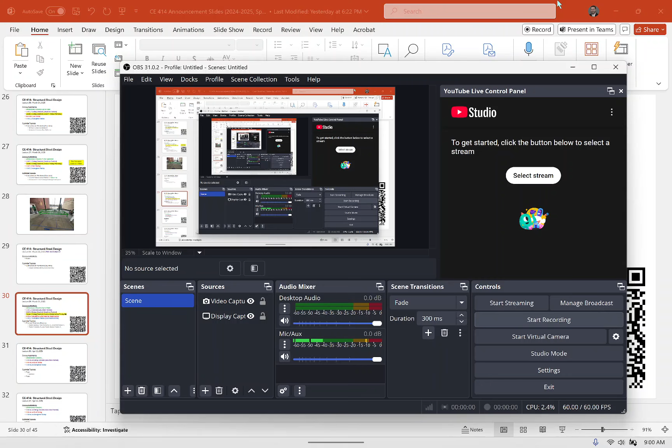Did they give you any background about the cup when they were announcing it, about the history of it?

I'll tell you a little background. If you look at the cup, we had won the competition about 10 years ago, but I think this was the first time the cup left the state of Virginia. Is that what they said? I don't know, they didn't say anything.

So a little background: the Hardy Cross competition goes back decades, but the actual trophy had to stay in Virginia because that's where Hardy Cross was originally from. So if a student in West Virginia won it, we got a little trophy, but the cup went back to the host school. About 7 or 8 years ago, the conference got together and bought a new cup that could travel, since the rules said the old cup had to stay. So they retired that cup, and I think it's at Old Dominion right now. I think this is the first time the cup has actually traveled outside of Virginia. So good job, sir.

Now we have to find a place to appropriately protect it. We've got our display case, but in all honesty we might get a new display case for it, I don't know. We've had some preliminary discussions about that this morning because it's heavy. I'm a little concerned about putting it in the one in the hall because of those little glass shelves. It's big, it might not even fit that way, maybe too deep.

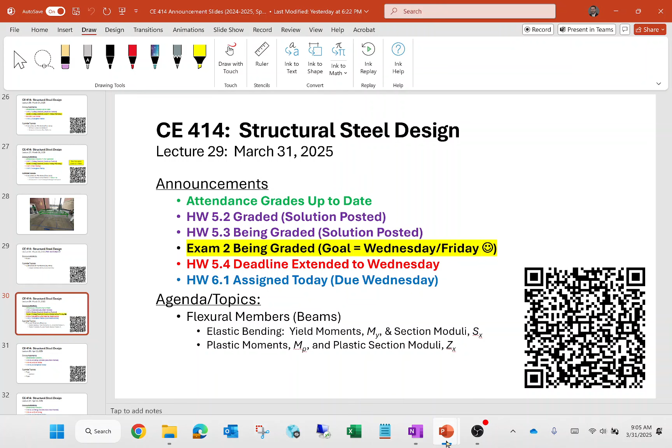I distracted everybody with discussions of trophies and whatnot. But again, congratulations to our team who did very well, had one of the most memorable canoe races in conference history. That was amazing, everybody in the crowd was like, well, you don't see that every day. That was spirit of the competition, right? Wouldn't you say we should have gotten spirit of competition?

We didn't? No, they gave it to the high school guy. Oh well, okay, they gave it to the high schoolers—they give it to them every year. They gave it to us. Okay, alright.

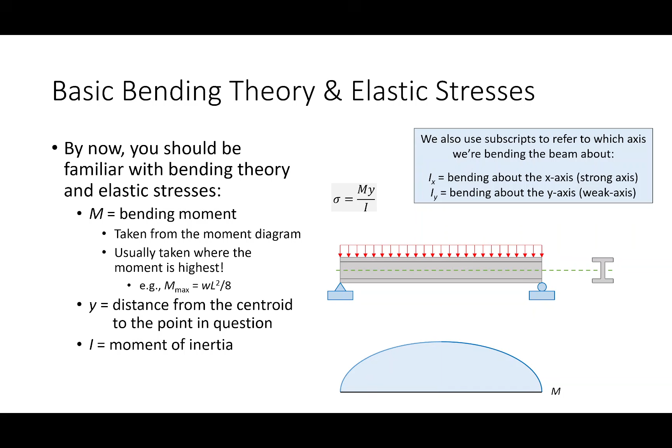And that comes from this: as the I gets bigger in the denominator, this gets smaller. So it also tells us that bending stresses are essentially zero at the centroid, and as you get further away from the centroid, the bending stresses increase, either in compression or tension. You've probably heard the phrase 'smiley face positive, frowny face negative.' So if the beam smiles at you, the top's in compression, the bottom's in tension. We refer to that as positive bending. Everybody with me so far? I'm not speaking way out of turn — everybody knows what I'm talking about.

Okay, so let's dig a little bit more into Engineering 216 territory. A lot of what I'm doing right now is both a refresher of concepts you should have seen before, and also introducing some notation. For example, the moment of inertia: we have a moment of inertia about the x-axis and about the y-axis, depending on which way we bend the cross-section, just like we have a radius of gyration about the x-axis and y-axis — an r sub x and an r sub y, just like we have an I sub x and an I sub y. We also have an s sub x and an s sub y.

So what's the deal with the section modulus, or this term S? Well, if sigma equals M y over I, that expression tells us the bending stress at any arbitrary point along the depth of the cross-section.

If the bending stresses are zero at the centroid and maximum at the top and bottom, and it's linear, we don't often care so much about the bending stress in between. What we care about is the bending stress at the very top or the very bottom. I'm not saying that's always the case—sometimes we do care about bending stresses in the middle, and there are clear examples of that in bridge engineering, for example looking at welds at certain depths. But usually all we care about are the maximum stresses at what we call the extreme fibers, either the very top or the very bottom.

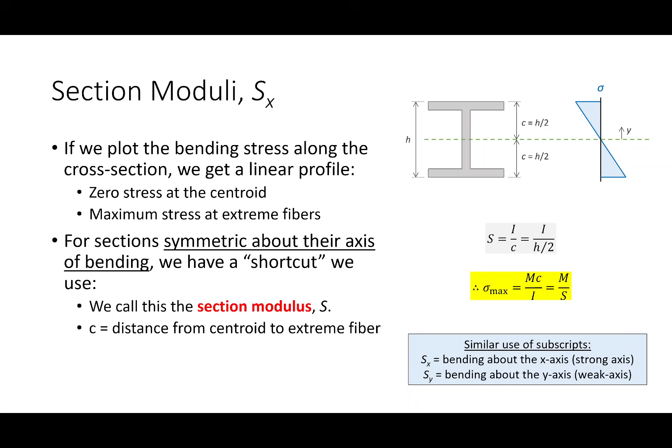We can look these values up for I sections—we can look up an I value, an S value, and an R value. Let me just make sure we're all on the same page, so let me orient everybody to what I'm talking about here.

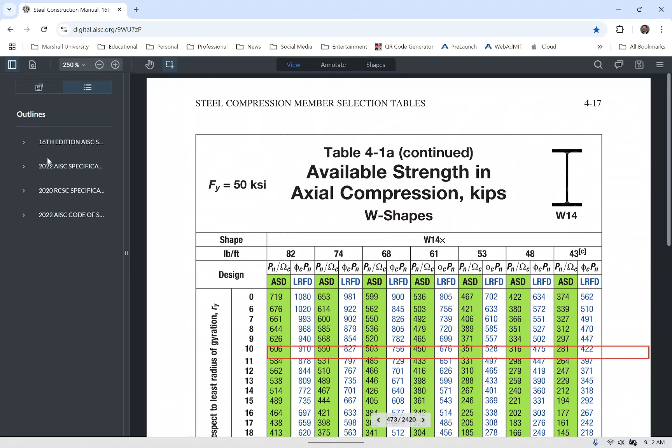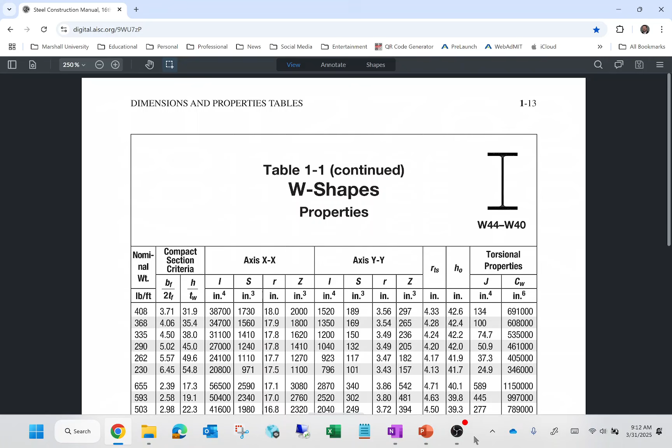For example, if I look at Table 1-1 looking at W shapes, on the right page you see the x-axis and the y-axis, and we have a moment of inertia, a section modulus, and a radius of gyration. What we haven't talked about yet is this term Z, and that's what we're going to illuminate today—what is Z, how does it apply to bending, and so on. We're getting there—if this were Sesame Street, this lecture is brought to you by the letter Z. That's sort of what we're doing here. We'll get to that.

Let's go back and rewind the clock a little bit to Engineering 216. Sigma equals My over I, or sigma equals M over S, is the expression we use to characterize bending stresses. In Engineering 216, we might say, for a given material, what is the biggest sigma that we will allow—what is the biggest stress we will allow? Since Engineering 216 largely assumes linear elastic behavior in mechanics-based calculations, we'll limit the stresses to Fy. That's our biggest sigma: sigma max equals Fy. So elastic bending theory holds true until that's the case.

So what we'll do is say, if sigma equals Fy, set that equal to M over S, what we can figure out is the biggest moment we can apply to a cross-section. That biggest moment, in this case, we'll call My, and that's again assuming elastic bending theory. I'm rattling on a bit, but I want to take a step back and be precise and clear: if you restrain your analysis to elastic bending theory, then the yield moment—the point at which the stress at the extreme fibers hits Fy—is the largest moment that the beam can withstand if you restrict its behavior to elastic bending.

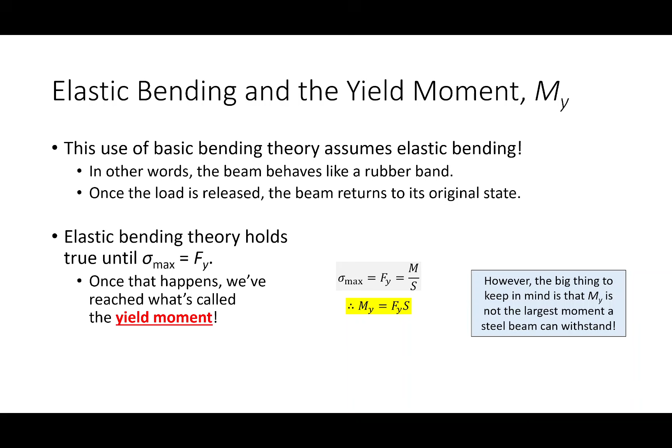So what the yield moment is saying is that I'm bending, and that stress profile is increasing until either the top or the bottom reaches Fy. And that is true. That's when elastic bending theory would break down, because then we've hit Fy on the top and bottom, and then we're going to start to lock in permanent stresses.

But then the question is, well, what happens past that? We're going to get to that. I want to take a step back and go through some Engineering 216 calculations with you. I want to be crystal clear: you are not going to have to do these calculations in this class. This set of slides on this example is really more meant as a refresher. I also want to use this symmetric example to explain not only what S is, but what Z is, and we'll get to that here in a bit.

So I have here an I-shaped cross-section. I'm trying to keep the cross-section really easy, so I've said that every plate is 1 inch thick. In all honesty, we would probably never design a cross-section like this, except maybe if it was a built-up section in a high-rise building where one column sees a ridiculous amount of load. In that case, you'd probably have a section like this, but in most routine practical applications we never use something like this. Again, trying to keep the math a little simple.

So just to make sure we're all on the same page, this is a 12 by 1 top and bottom flange. The web is 24 by 1 inches. So the total height of the cross section is 26 inches, because it's 24 plus 2 plates on the top and bottom. Remember that term extreme fiber distance - from the centroid to the very top or the very bottom. Without calculating the location of the centroid, do we all agree the centroid's running right through the middle of this? It's symmetric, right? It's the same picture up top as it is down below. So the extreme fiber distance, the c distance, from the centroid to either the very top or the very bottom, is going to be 13 inches, or half that. Everybody with me on that?

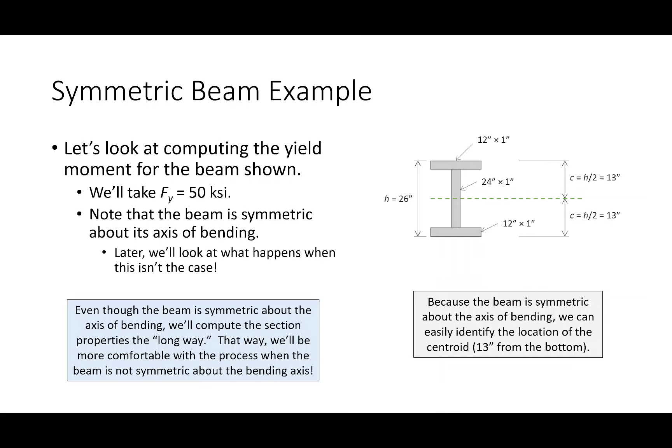Okay, so a lot of stuff here on this slide. I'm not making you do this by hand, but there's a lot here, so let's take our time with this. I don't know how you learn to compute a moment of inertia, maybe in 216. I know how I teach you to do it in statics. I'm an engineer, I love things in tables, so that's how I do it. So what I'll do is walk through this calculation.

So I have a big table. First thing I'll do is list the shape - I've got the top flange, web, and the bottom flange. Then for each shape, I'll list the area. Remember, everything is 12 by 1, or 24 by 1, and the thicknesses are 1 inch. So this is 12 square inches, 24 square inches, 12 square inches. I also have a sum row at the bottom, and the sum is 48. Everybody with me on that?

Okay, now what about this column right here? Now, I am doing this the long way, and I would argue that for this problem this is a little bit overkill, but I like showing you this way because whenever the shape gets non-symmetric, suddenly this becomes a lot more relevant.

All right, so the next thing we need to compute are these y distances. What I'll do is define a common reference axis, which I tend to call a datum. Basically, from the datum, how far is it to the centroid of each of these individual shapes.

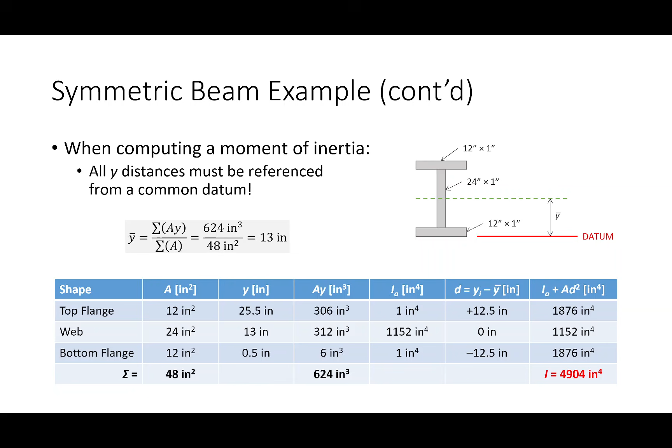Okay, good. So if I wanted to compute, let's say, the yield moment, what I would do is say, here's the moment of inertia. I would take the moment of inertia divided by the extreme fiber distance to get this term, which I'll call the section modulus. Take the section modulus, multiply it by, let's say, 50 KSI, if that's the yield stress. So 50 KSI times this gives me an answer.

Be cognizant of your units, because this is KSI in inches to the third. I'm calculating a moment, so this comes out in inch kips. So if I want foot kips, I got to divide by 12. I get a yield moment of 1571.8 foot kips. That is the maximum amount of moment I can place on this section before I get yielding at the very, very top or the very, very bottom. Does that make sense? All right, any questions on that?

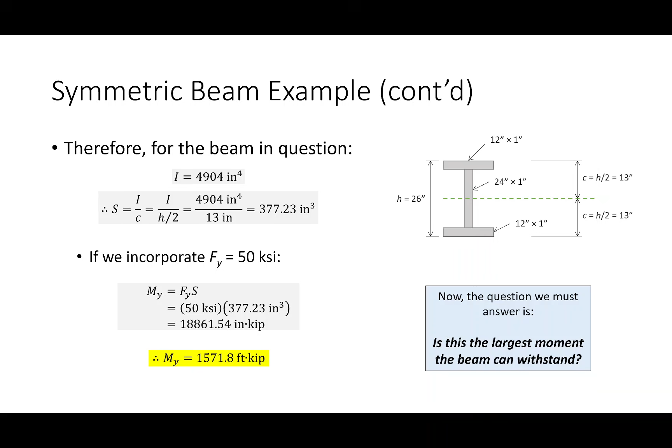Now I posit my question again. Is this the largest moment that the beam can withstand? Can it withstand more moment than this? Let's state the question different ways. Is this the largest moment the beam can withstand? No, the beam can withstand much more, and this is the reason why.

Let's look at this pictorially. This is the yield moment right here. What happens with the yield moment is we start off with zero bending stress, and then as we apply moment, we get more and more bending. Once the very top or very bottom hits Fy, that's the yield moment.

But the reason why that's not the largest moment the beam can withstand is this part of the beam has yielded. What about right here? Has this yielded? What about right here? What about right here? So the question would be, what if I've got the beam here in front of me and I'm putting load on it, putting load on it, putting load on it, and then I hit my...

What if I keep putting load on it? Just keep putting more, keep putting more. What's going to happen is, as we start going like this, this is the maximum stress. As we keep applying moment, the yielding is going to penetrate through the cross section until we hit this point, when every point in the cross section is yielded. So I propose that the yield moment is when we just start to hit Fy at the top and bottom, but this moment over here is when the yield stress is everywhere.

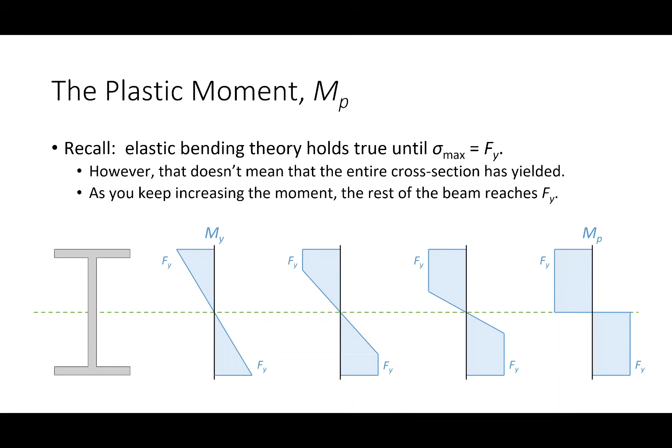Now some of you might be thinking that seems harder, seems more difficult to do the math for. But I would argue that computing MP is actually a lot easier than what we just did to compute MY. I think MY is a harder calculation. MP is a lot more straightforward, because MP is basically just summing moments about the central axis.

Let me ask a question. How many of you have already had concrete design? I'm curious if anybody here has had concrete design. For those who have, you'd know that for a singly reinforced beam, we assume the concrete reaches 0.85 FC prime in compression, we assume the steel is As times Fy, we find that magic distance A such that C equals T, and then we sum moments. Same idea here, the only difference is we don't have concrete and steel, we have just steel.

For those planning on taking concrete next semester, one of the very first things you'll do in the class is learn how to compute the capacity of a singly reinforced concrete beam. The way you do that is pretty much this, only with concrete you have to deal with two different materials, concrete and steel. Here it's just steel.

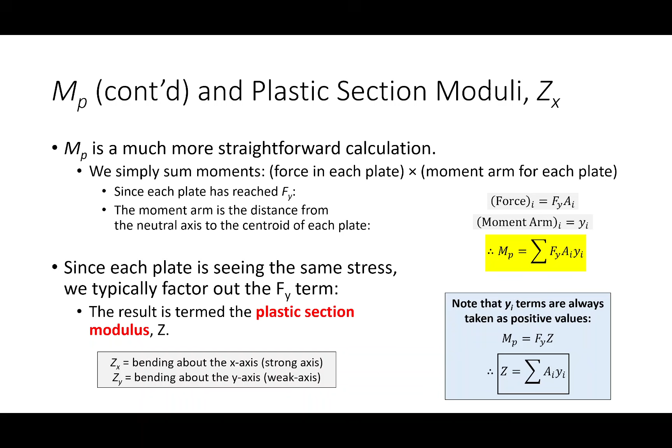In this case, we're going to call it Z. I can pre-calculate a Z value for any cross-section and have those tabulated. So what is Zx? Zx is what we call the plastic section modulus. And I should say we have a Zx and a Zy, but Zx is far more utilized in steel beam design, so I'll probably use the term Zx quite a bit. But all Z is a calculation of areas times distances.

So just to walk you through how you would compute Zx, it's really, really easy. Let's go back to the symmetric beam design. So in that design, we got this value for S, and this is what we got for My. Okay, so how do we compute Z?

Well, the first thing we have to do is figure out the line where the area above equals the area below. Why is that important? Because we're going to take those areas and theoretically multiply them by a yield stress to get a force. So we have to find the magic line where the force above equals the force below, or the force in compression equals the force in tension, because the beam can't run away from you.

So that axis needs to be found. Now, in the case of a beam that's symmetric, that's just the same place where the centroid is, okay? This line, the area above equals the area below. Some of you might be thinking, well, isn't that always the case? Isn't the line where the area above equals the area below the same as the centroid? The answer is no, that is not always the case. I'm going to show you an example today where that happens.

But once we find that line, all we do is take areas times moment arms. For example, the top flange: we take this area, 12 times 1, times that moment arm, so 12 and a half, so 12 times 12 and a half. What about the upper web portion? The area of this rectangle is 12, and how far is it from this line to the center of that web? 6 inches, right? So we do that for this, for this, for that, for that, and we get the Z value. Take Z times Fy, there's Mp. It's a lot easier than the S calculation, a lot easier.

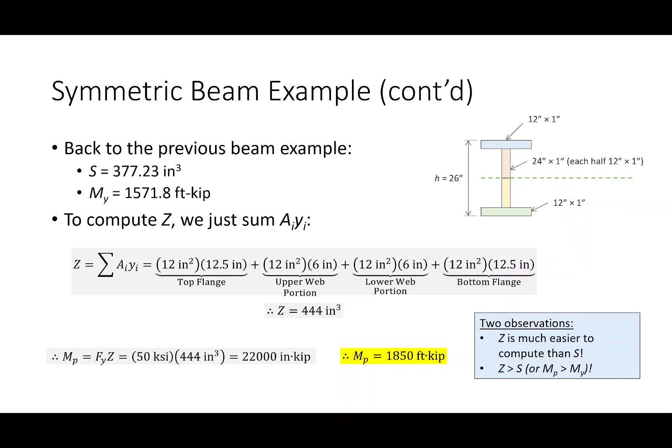Now, everything I put on the slide here is good, great, grand, and wonderful for symmetric cross sections. But what about sections that are non-symmetric? I want to introduce some terminology: the elastic neutral axis and the plastic neutral axis. The difference between the two is the elastic neutral axis is where the centroid is, but the plastic neutral axis is that magic line that splits the section up into equal areas—in other words, the area on top equals the area on the bottom. That is not always the same case, and I'm going to show you an example here in a second where that's not the case.

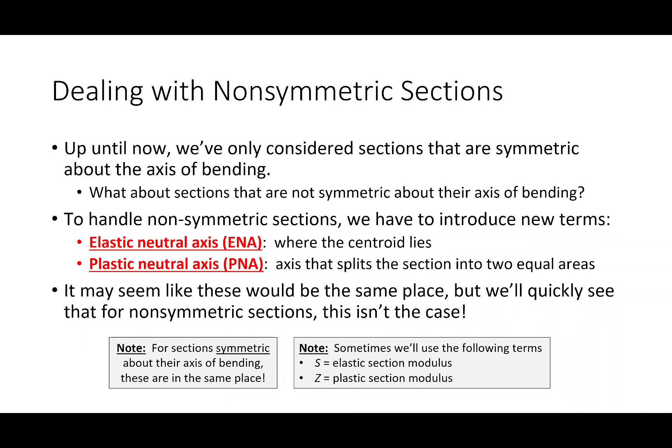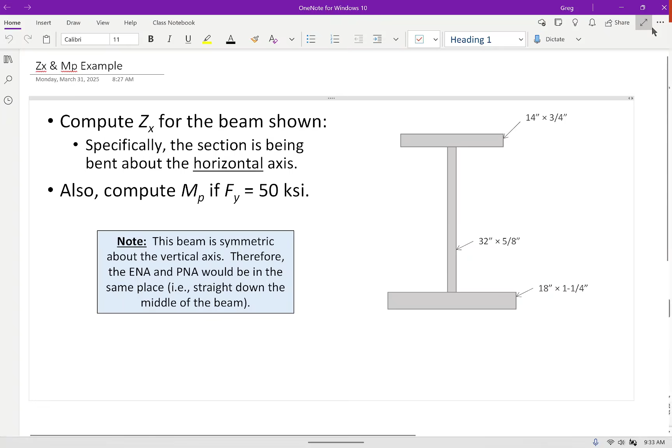Let's do an example because I think it will sink this in a little bit more clearly. I want to compute Zx for this shape. Now I've added a little more resolution to the numbers, so we've got different values, different thicknesses, and different plate widths, so as we do the problem we'll have a little more tethering to what we're doing. But it's not symmetric—in other words, the top flange and the bottom flange are not the same size.

Is that common in the real world in bridge engineering? You bet. It is very common that you have different size flanges for fabricated plate girders. That's very common. In fact, it's probably more common than the alternative, with them being the same size.

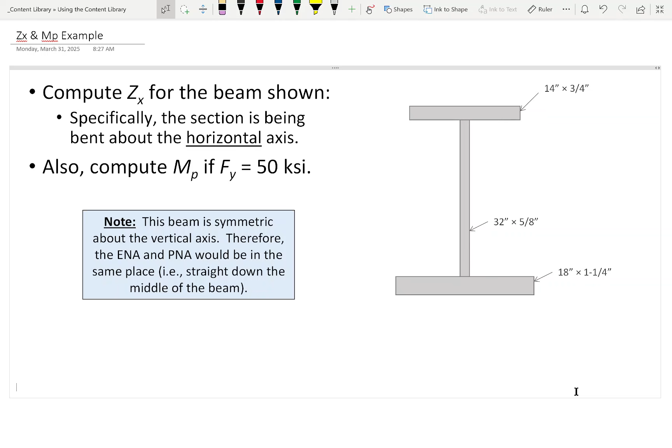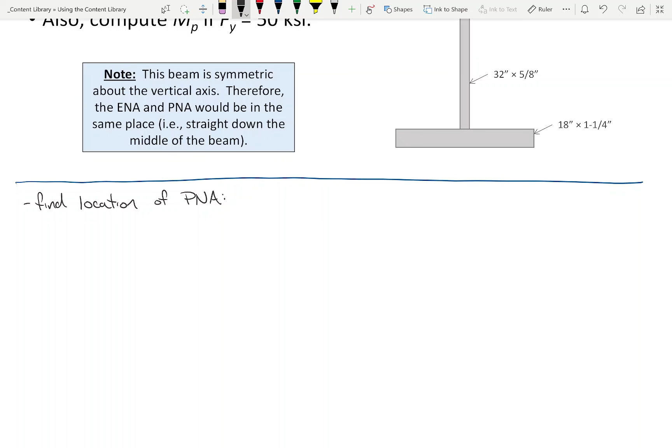Now, in order to compute Zx and ultimately Mp, the first thing we have to do is find the spot—some line, like right here, where the area on top equals the area on the bottom. Find the location of the PNA. I'm going to draw this again, so bear with me.

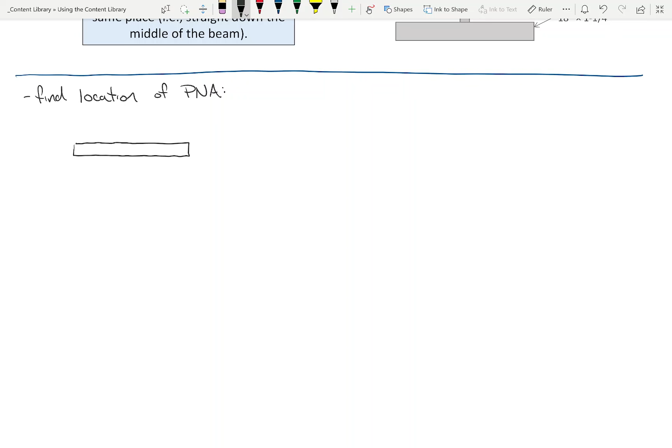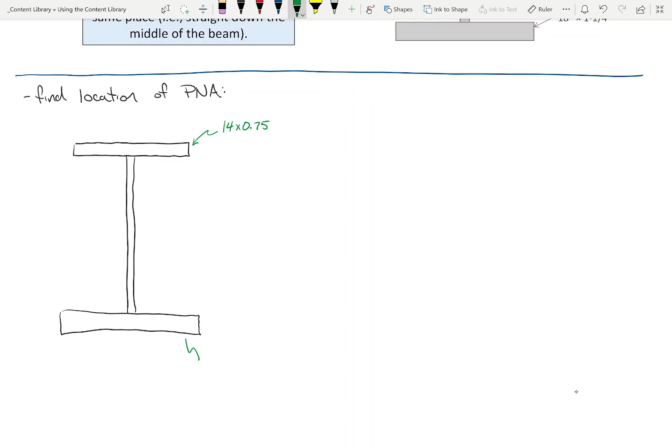Okay, so this is 18 by 1.25. Now this right here, this thickness is 5/8 of an inch thick.

By the way, I should mention that for this example, I may be a little bit fast and loose with actually writing the unit symbol on every single calculation, especially because I'm going to be writing some formulas. But everything's in inches for the ZX computations. That part shouldn't be that big of a deal.

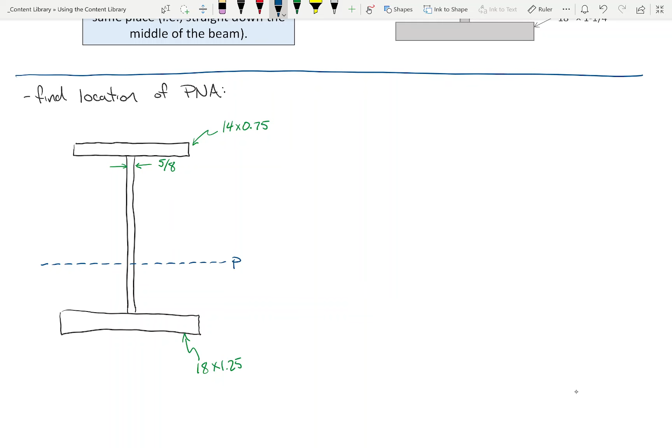Okay, now what I'm trying to do is find this line. And I'm trying to find this line such that the area on top equals the area on the bottom. Now, I don't know where that line is, okay?

So algebra tells me that when I don't know something, maybe I'll call it x, okay? Now, if that dimension is x, I'm going to move this 5/8 over. If I don't know something, I call it x. If that dimension is x, what is this dimension right here? 32 minus x, 32 minus x.

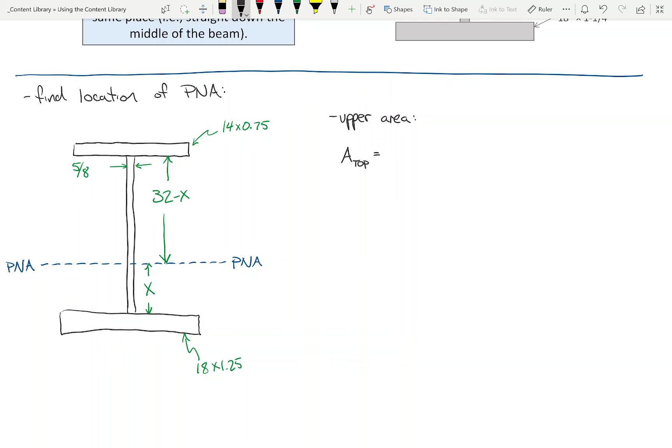So let's see if we can write a formula for the area above and the area below. So we'll call this area of the top. Okay, and so what is this going to equal? This is going to equal 14 times 0.75, plus, and then it's going to equal that times that, right?

So excuse me, do a little bit of algebra. 14 times 3/4, that's going to be 10.5, plus, and then how do we do this? We have to do 5/8 times this and 5/8 times that, right? So this is going to be 5/8 of 32, which is 20, minus, and so that's going to be that, right? Is that fair?

Yes. And the 5/8 times 32 minus x is just the area of the web above the line, yes. So that times that, which is that distance.

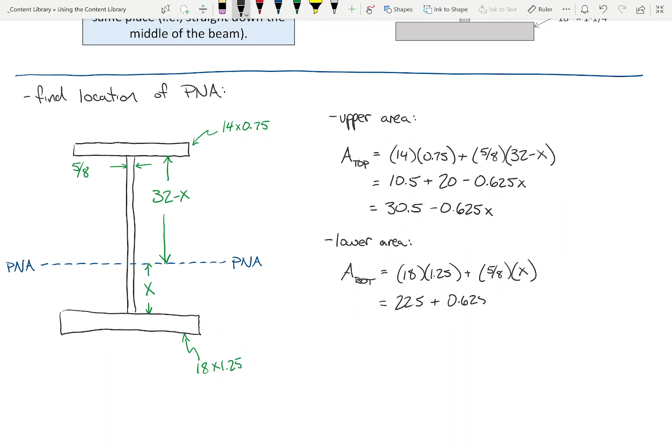Now for the bottom, call that area sub bottom. So what am I going to do for this? You tell me: 18 times 1.25, plus x times 5/8. So 18 times 1 1/4, that ends up being 22.5, plus 0.625x. Does that make sense?

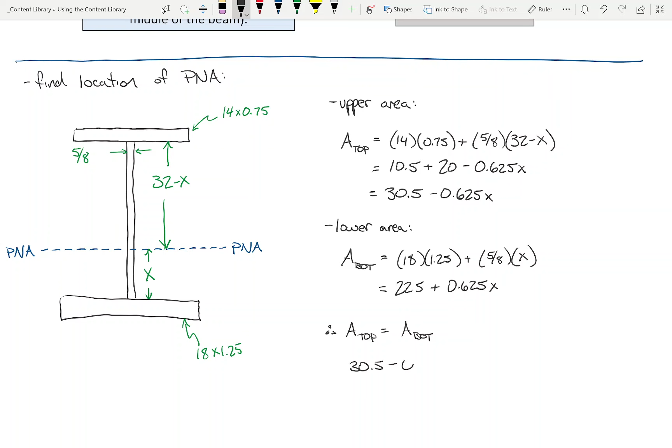So therefore, the area on top has got to equal the area on the bottom. So 30.5 minus 0.625x equals, I'm going to scroll that up just a bit.

I don't like dealing with negatives if I can avoid it, so I'm going to add that on either end, okay? That's going to cancel that, right? Then what I'll do is subtract that. So that cancels.

And so on the left, I'm going to get 30.5 minus 22.5. So what is that, just 8? And then I'm going to get this, right? Because this is 5/8 plus 5/8, so that's 10/8 or 5/4 or 1.25, right? So that means x equals what? 6.4, okay.

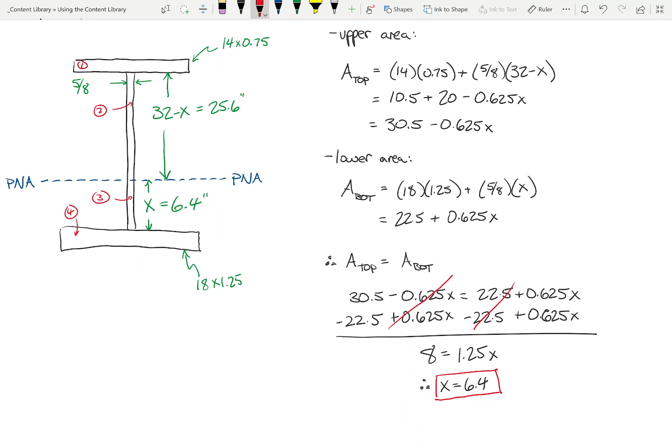Okay, everybody good? Okay, now to compute zx, okay, I'm a numbers guy, so I'm going to number this. So I'll just say 1, 2, 3, 4, right? Everybody see what I'm doing here?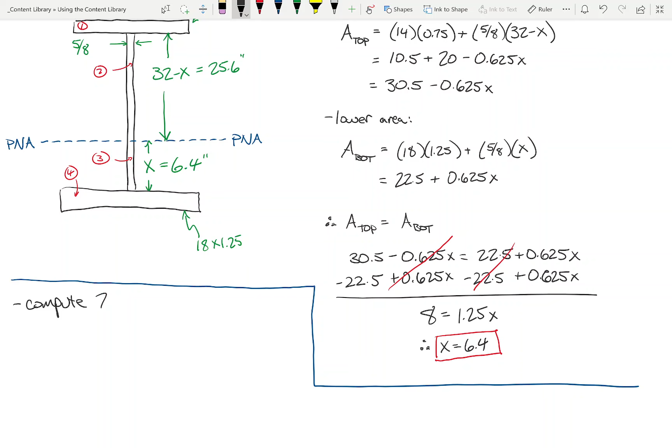All right, so I'm probably going to need your help a little bit here. I'm going to try and not scroll too much. We know the area of shape 1 and shape 4. Shape 1 is 10.5. Shape 4 is 22.5, because we did that. Okay, so help me out. What is the area of shape 2?

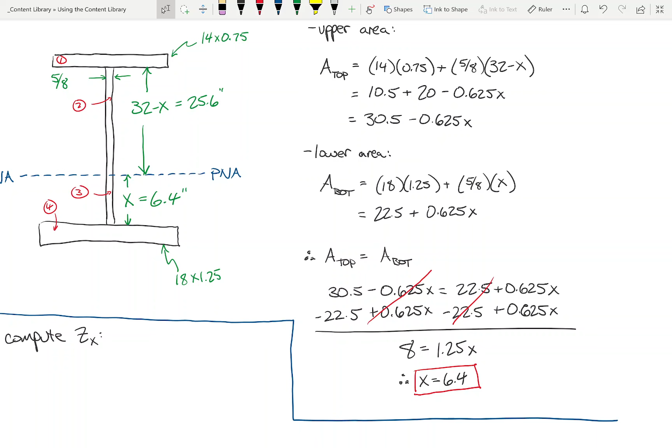So it's going to be 25.6 times 5/8. What is that? Okay, what about this one? 4. Okay, so, all right. So if that's the case...

So would this be fair? Would that be fair? By the way, what is the sum of these two? 26.5. What's the sum of these two? So did we find the line where the area up top equals the area on bottom? See, so, nice little check.

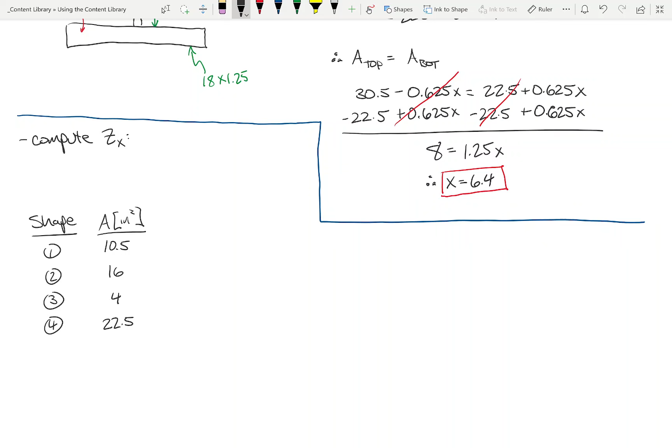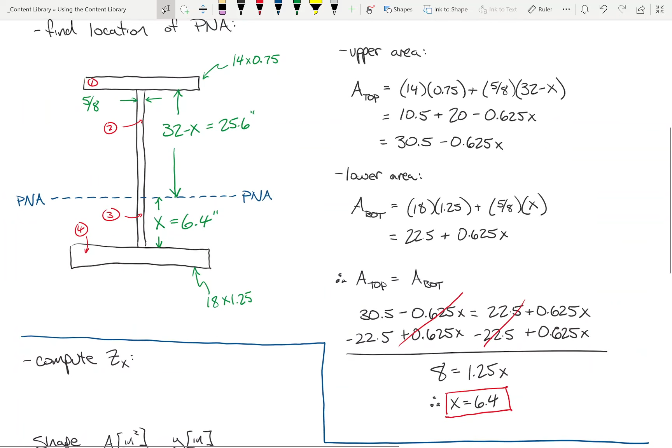Okay, I'm going to try not to scroll up and down too much. Let's start with shape 1.

If I were to go out, we'll say 1, 2, 3, 4. So for shape 1, how far is it from the PNA to the center of shape 1? I go up 25.6 plus half of that thickness. What is that?

25.975. How about shape 2, how far is it from the PNA to the center of that shape? It's just going to be half of 25.6, right?

12.8. I think I can do shape 3 in my head, because if that's 6.4, half that's going to be 3.2. Then shape 4, so it's going to be 6.4 plus half that thickness, right? So what is that? That is 7.025.

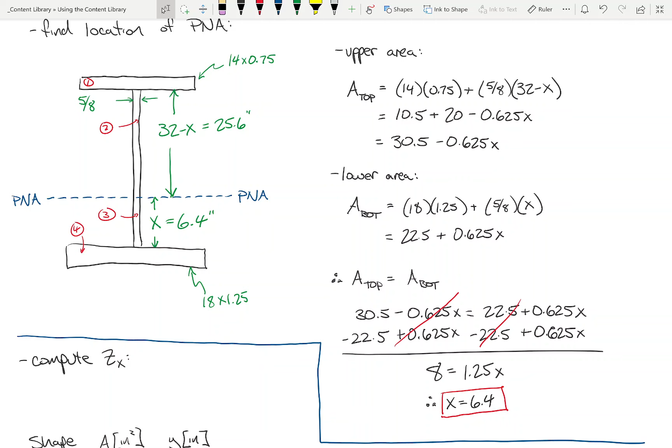Is that okay? Did I do that too fast, or is everybody with me on that? So here I'll scratch it down on the screen. This is... and this is 12.8. I know that marker was kind of dying on us a little bit, but does that make sense? Is everybody with me on that?

So now what I'm going to do, remember, it's essentially force times moment arm, but instead of force times moment arm, it's really area times moment arm. So for each row, I'm just going to say, what is this times this, this times this, this times this, this times this. I'm sure you all can do that one on your own.

So I've got 272.74. I've got 204.8, 12.8, 158.06. So if I sum that, I get 648.4. In other words, that's my answer.

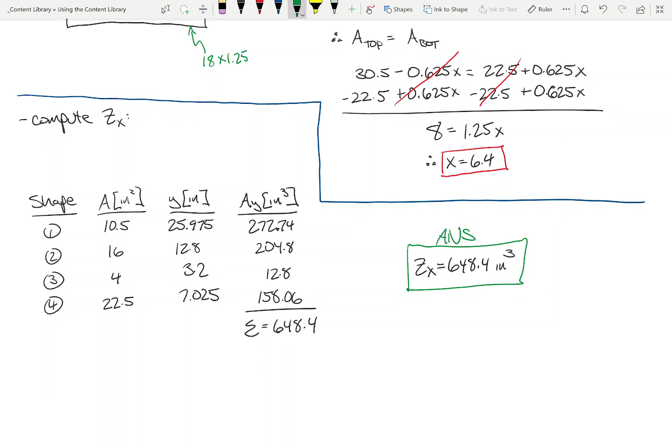Okay? And by the way, to compute Mp, just multiply that times 50 KSI. But if you do that, this is going to be KSI times inches to the third, so the units are going to be inch-kips. So I'm going to divide by 12 to get it in foot-kips.

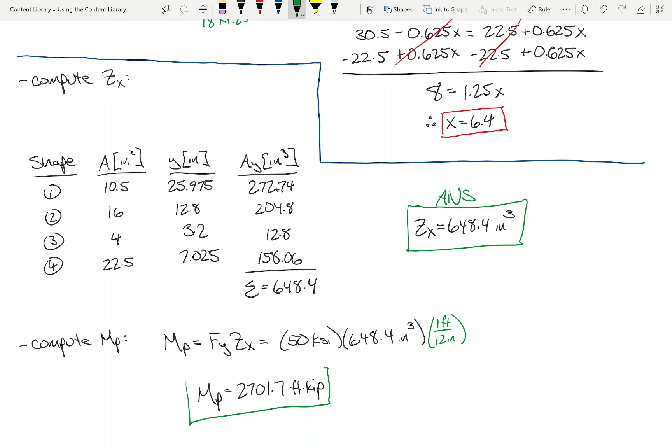And this is there's that. I do have a couple things I want to show you on the slide. I know we're getting short on time, but before I go down the rabbit hole on that, does anybody have any questions on this? How's everybody doing so far? Is this making sense?

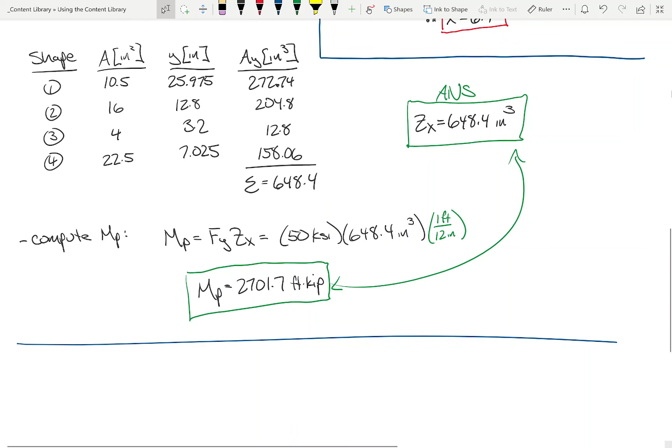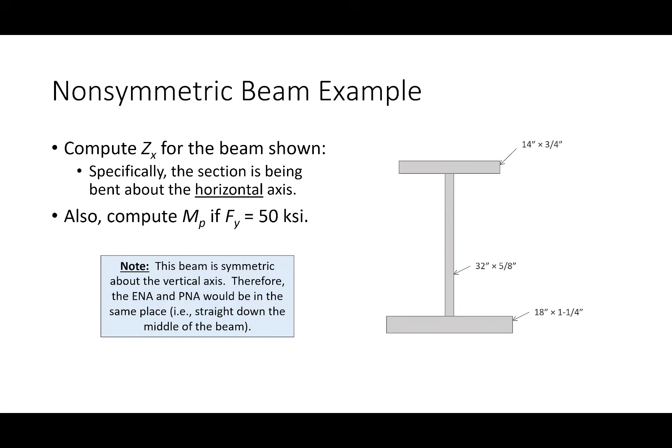All right, I'm going to give you a problem on this type of topic, due Wednesday, but I just want to show you a couple things in the slides. So first off, if you take this problem and go through and compute it like we did before, trying to compute IX and SX and all that.

A couple things to point out. The first thing I love pointing out is this: the centroid calculation is computed as the sum of AY over the sum of A. It is a weighted average, but a weighted average is not the same thing as the line where the area above equals the area below. If I'm inaccurate in that, this should have been 6.4, or rather 6.4 plus the thickness of the bottom flange, and it's not. As yielding propagates throughout the section, the axis has to shift to maintain equilibrium. So the axis actually goes down from elastic to plastic in order to maintain equilibrium. That's why that's different, okay?

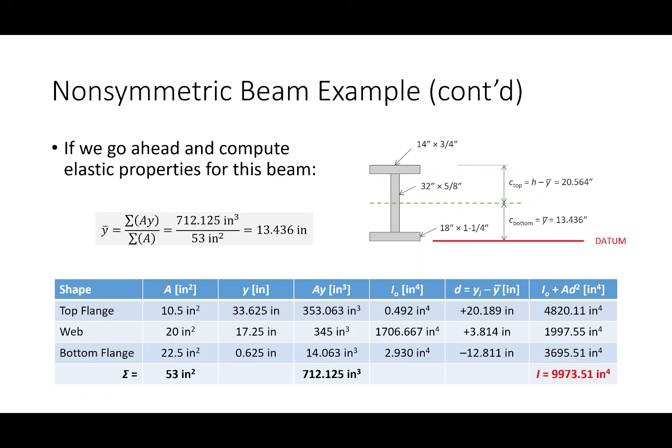And if you go through and chug it out, you will find that this is MP and this is MY. The way you calculate MY when the section is non-symmetric is you calculate an SX for the top and an SX for the bottom, and just take the smaller of the two.

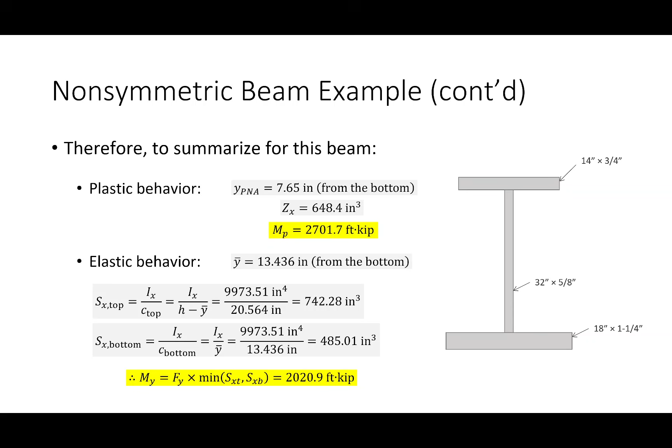And again, it's lower. So just some final observations: when the beam is symmetric, the ENA and the PNA are at the same location. You only get one S value, and again, MP is larger than MY. When it's not symmetric, that's not the case, and MP is still larger than MY though.